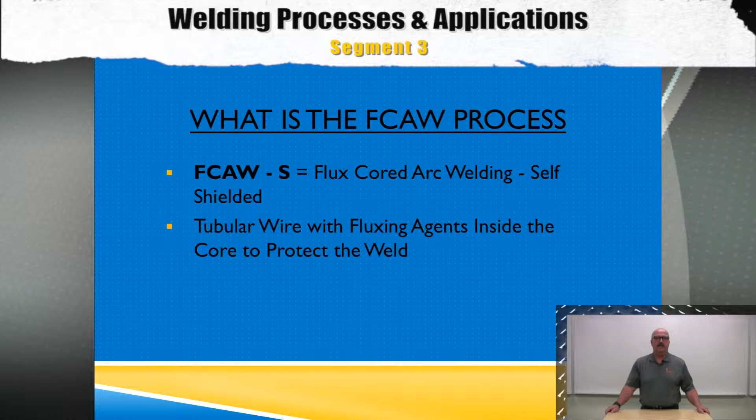What is the FCAW process? This stands for Flux-cored arc welding. The Flux-cored arc welding process uses a tubular wire filled with fluxing agents and powdered metal. The flux will burn during the welding process and create a shielding gas to protect the weld pool during cooling. Most FCAW electrodes run on DCEN, or DC electrode negative polarity.

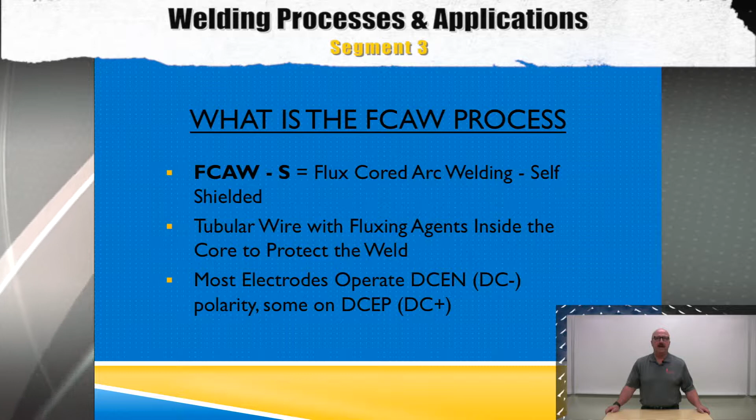What are some of the advantages of the Flux-cored arc welding process? Well, it is very comfortable and very usable in outdoor applications. And because it is a continuous electrode, restarts are kept to a minimum. Another very important advantage is that no shielding gas is needed. And the Flux-cored arc welding process also has a high deposition rate and can be easily matched to base metal mechanical properties.

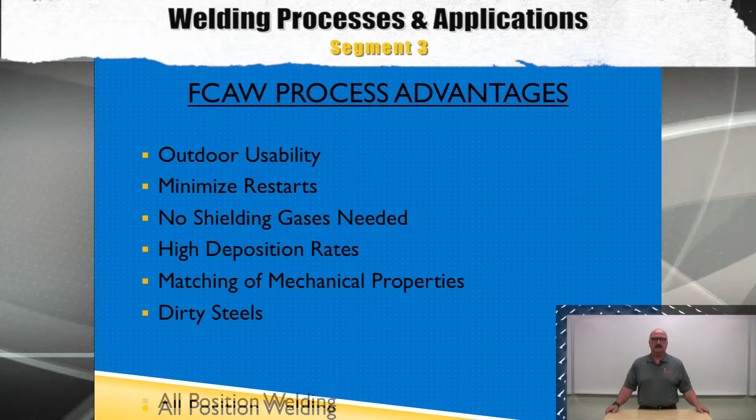Because of the forceful arc of the FCAW process, dirty steels may not need to be pre-cleaned, and this could be a very labor-saving advantage of the process. Like the other processes we have covered, the FCAW process can be used in all positions.

Now a little bit about the FCAW process limitations. Heavy smoke and fumes can be one of the limitations that operators may encounter. This can cause discomfort if the right precautions aren't taken. The FCAW process also can cause spattering problems during the welding process.

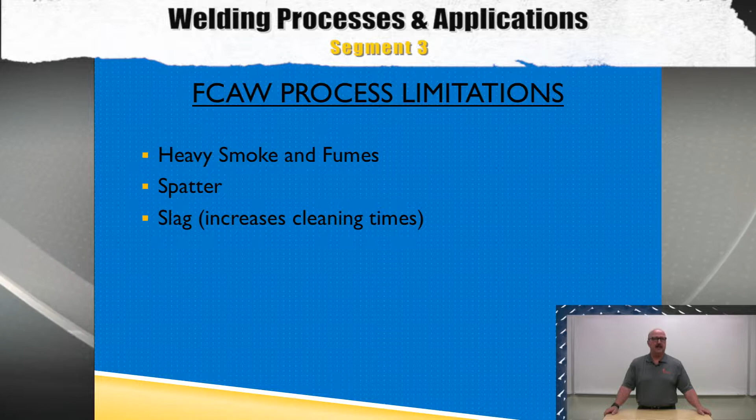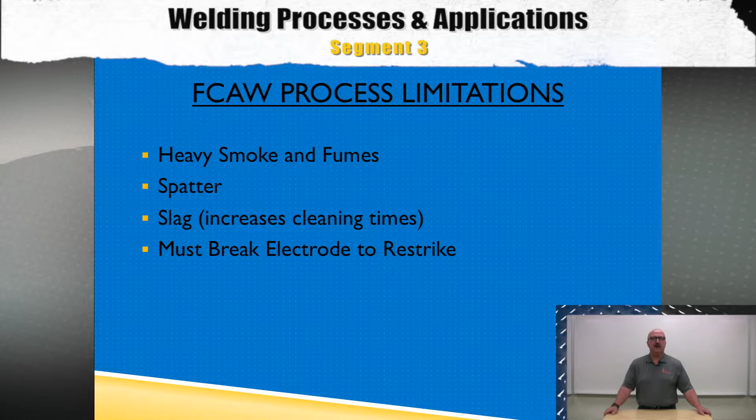Because the FCAW process has a slag, it also takes interpass cleaning to properly apply the process, which is a time factor in production. The final limitation is the need to break the tip of the electrode off before restarting. When the FCAW process is used, a small ball of flux accumulates at the end of the tip and needs to be broken off before a restart of a weld is accomplished.

I'd like to describe the AWS classification numbering system for FCAW electrodes. The first part is an E, which stands for electrode. The next will be a digit, probably a 7, 8, or 9, and you times this digit times 10,000 to get the minimum tensile strength of the electrode.

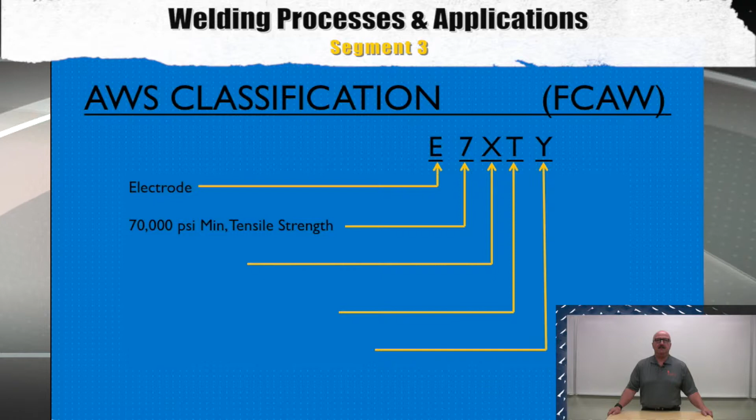The third part of the AWS classification system indicates the welding position. A 0 will indicate the welding electrode is used in a flat or horizontal position. A 1 will indicate that it can be used in all positions.

And the next part is always a T. The T tells us that this is a tubular electrode. There will be no other letter in this position. And the final part will tell us the usability and performance capabilities of the electrode.

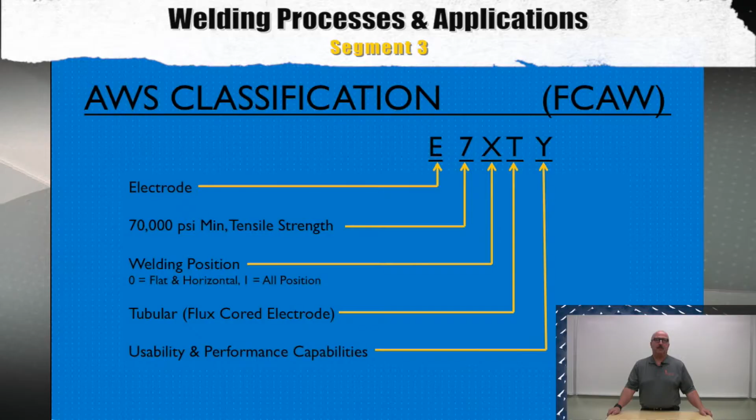Now we're going to move on to our demonstration portion of this lesson. We're out here in the welding lab, and I'd like to show you some of the variables that you may need to consider before you start flux-cored welding or GMAW welding, along with a little information on the differences between the two.

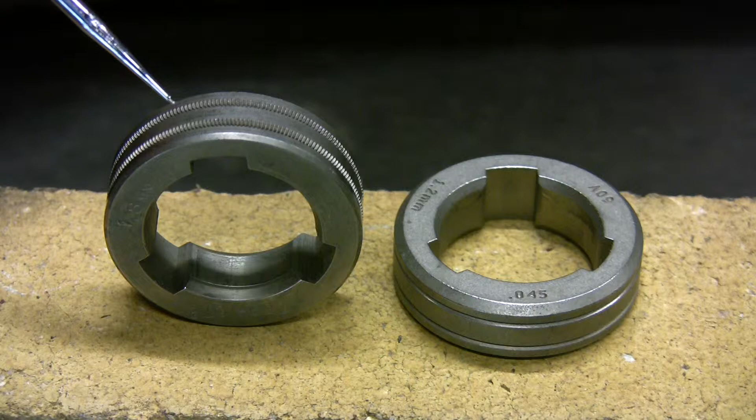Here we have two different drive rolls. One is from the FCAW equipment, the other is from the GMAW equipment. If you'll notice, the drive roll from the FCAW has a knurled pattern along the outside diameter of the drive roll. This is so it can grip the tubular wire, which is a little bit softer than the GMAW wire. So be sure to recognize this when you do your equipment setup.

Another important item to notice on our drive rolls: what size is the drive roll? All drive rolls should have a stamped size on them. Be sure your drive roll size matches your wire diameter.

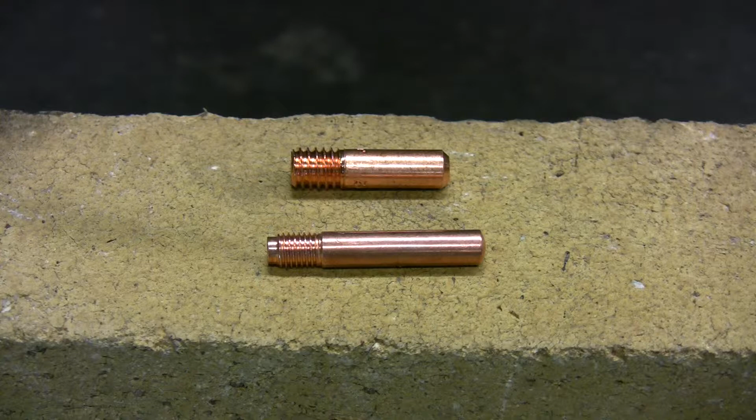Here we have another equipment variable all welders should be familiar with: a typical FCAW contact tip and a typical GMAW contact tip. Two of the things you can see right away is the lengths are different. The GMAW is a little bit longer, with a little bit smaller thread pattern on them, as opposed to the FCAW, a little shorter, a little bigger diameter with a heavier thread pattern.

One thing the contact tips have in common: they should all be stamped with the size of the contact tip. All welders should coordinate this size with the wire diameter that they're about to use and be sure that it's a match.

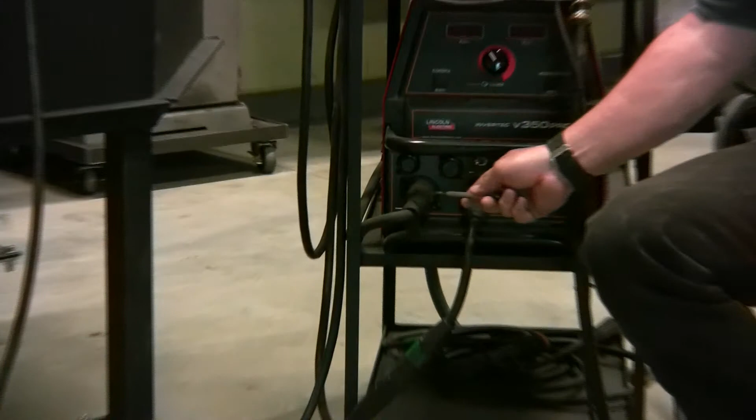Here we have a typical FCAW equipment arrangement. For our power source, we have the Invertec 350 Pro from Lincoln Electric. From our feeder, we have an LN25, also from Lincoln Electric. The only connection between the two is the negative cable from the feeder is plugged into the negative terminal of the power source.

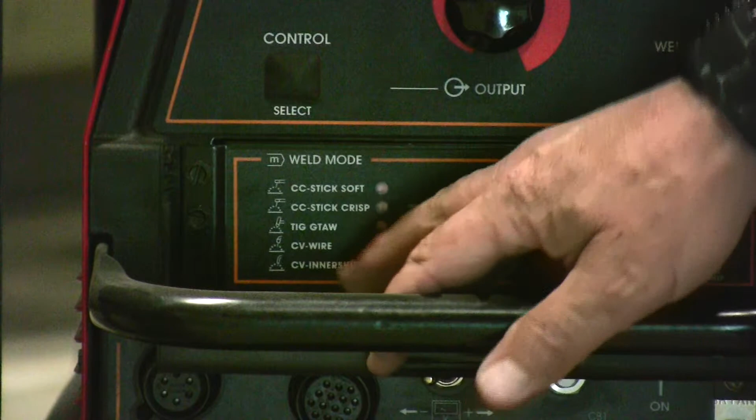Also, on the front of the power source, be sure to be aware of what mode you are in through the mode selection switch located at the left. We want to pick the very bottom mode, which is CV inner shield, constant voltage inner shield, a requirement of the process. So we want to select that.

We want to be sure our voltage is adjusted properly. We have our voltage adjustment knob here in the center. Then we move up to our feeder, where our wire feed speed adjustment knob is located. Be sure to use the range selection switch located below the adjusting knob to pick either the high or low range, and that'll tell you which color code to use when selecting the proper wire feed speed.

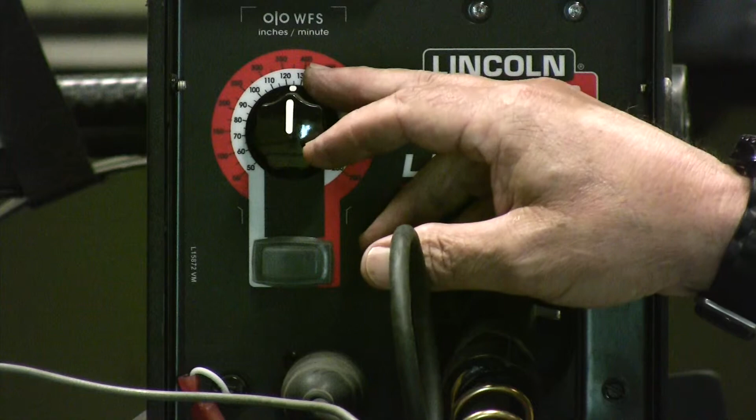Along with that, to power this wire feeder, you must connect the voltage sensing cable from the feeder to the work being welded. That should power up your feeder, and you should be ready to pull the trigger, strike an arc, and start the welding process.

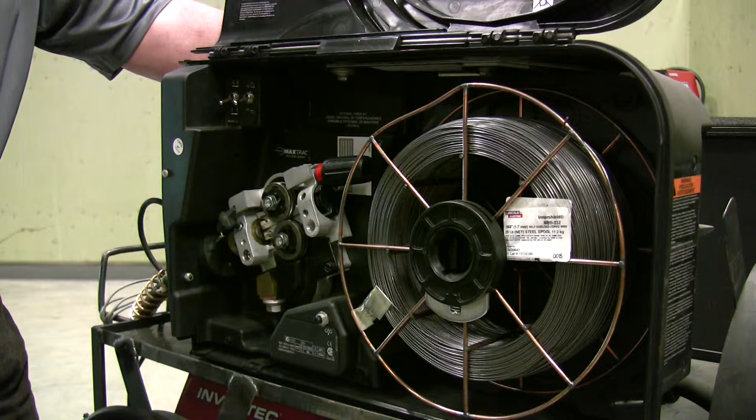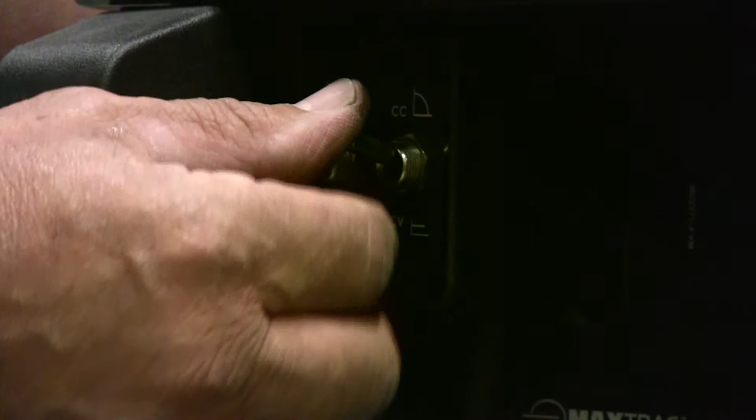Here we have the interior of our FCAW LN25 feeder. Some important features a welder needs to know about. The first is the CC-CV switch. We know from our mode switch in the front that we're in CV mode, so the feeder must match the mode set at the power source. Here we are in CV.

Another important feature is our drive roll system. Here we see our ability to change drive rolls with no tools. We just line up the star with the groove on the drive roll and pull the drive roll off. No tools required. Simple reinstall: just reverse it, push it on, and push the star back to the lock position.

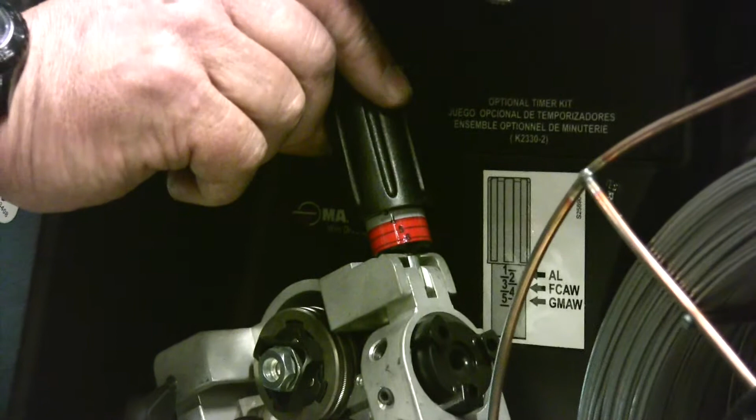The next good feature of this feeder is it has a built-in tensioner that the welder needs to realize is right above the feeder, and refer to your manufacturer recommendations for the tension for a certain diameter of wire.

The final issue we have inside the feeder is to be sure to identify the AWS electrode classification. Be sure you know which wire you are using, and that it is the proper wire for the application.

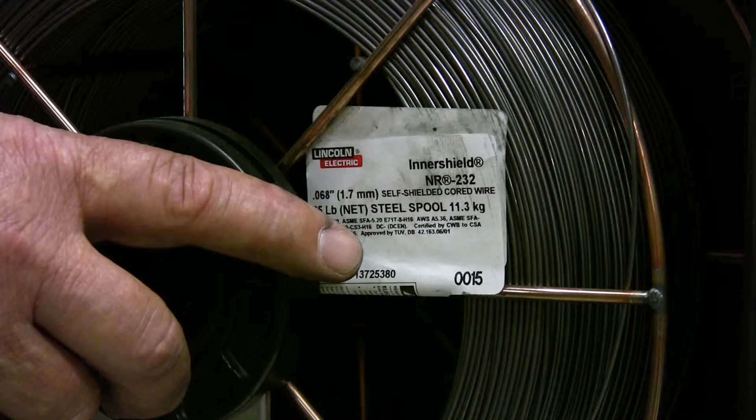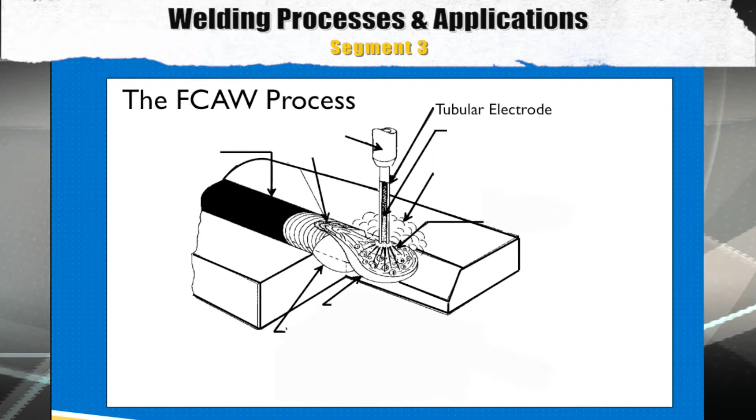To finish up our notes on the FCAW process, I wanted to show you a few detailed variables a welder needs to consider. The first item on the slide is the tubular electrode. Its main purpose is to supply filler metal to the molten weld pool.

The next item is powder metal and flux. The powder metal from the center of the electrode will transfer to the molten weld pool to enhance weld metal mechanical properties. The fluxing agent from the center of the electrode serves two purposes: one is to burn off and generate a shielding gas to protect the molten weld pool, and the second is to form a thin layer of slag over the solid weld metal deposit to protect it during the cooling process.

The next item is the shielding gas envelope. This shielding gas is created by the burning off of the fluxing agent from the center of the FCAW electrode. Like in other processes, the purpose of the shielding gas is to protect the molten weld pool during solidification.

The next item is the arc and transfer modes. All arc welding processes have the arc in common, which generates the heat to melt the base metal and the filler metal to create the molten weld pool. The transfer modes noted in this slide refer to the different possible modes. The three very popular transfer modes are short circuit, spray, and globular.

The next item is the weld pool. This is another item that arc welding processes have in common. Some variables to consider are welding technique and travel speeds in an effort to control the weld size.

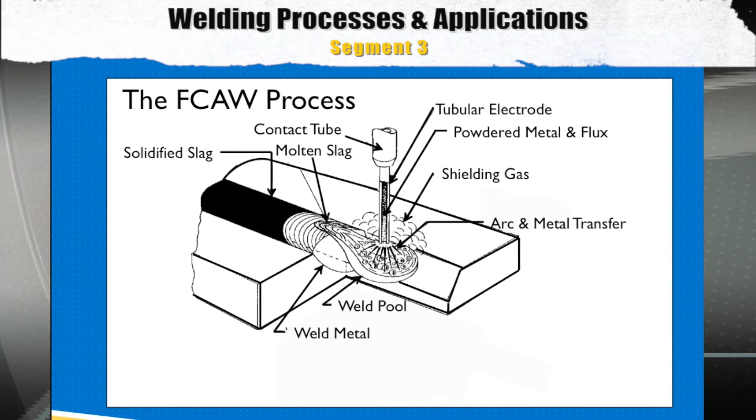These are all the variables a welder needs to be comfortable with when performing the FCAW process. That's all we have for you today.